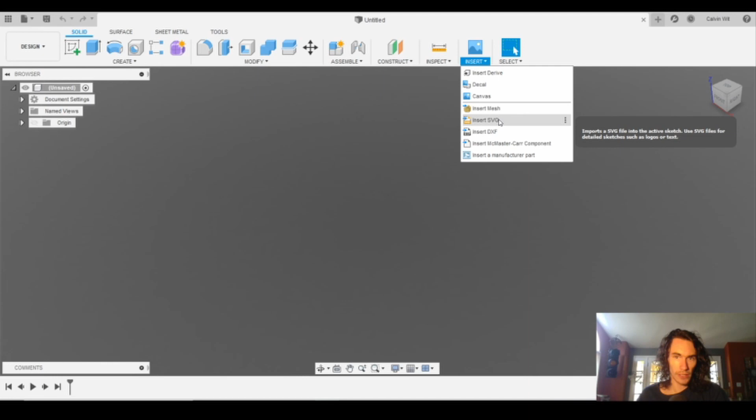Now, here we are in the Fusion workspace. It's actually pretty simple to pull this off. What we're going to do is go to Insert, then Insert SVG. I like working in the top plane whenever possible.

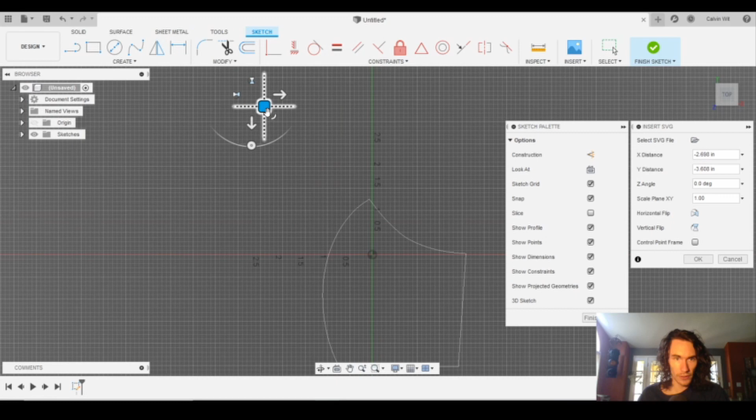Select the SVG file, and I know it's under my downloads. And you guys get to see all my downloads. I've already gone through and made these for my friend, obviously. But when you get your SVG imported, you can just drag it so it's approximately centered. The sizing looks right, I'm not going to worry about that. I'm going to say OK.

You'll see here, this is our SVG template. Now what we can do is press Finish Sketch, press E to extrude, and I like to pull mine up about 1/8 of an inch. I find that works pretty good.

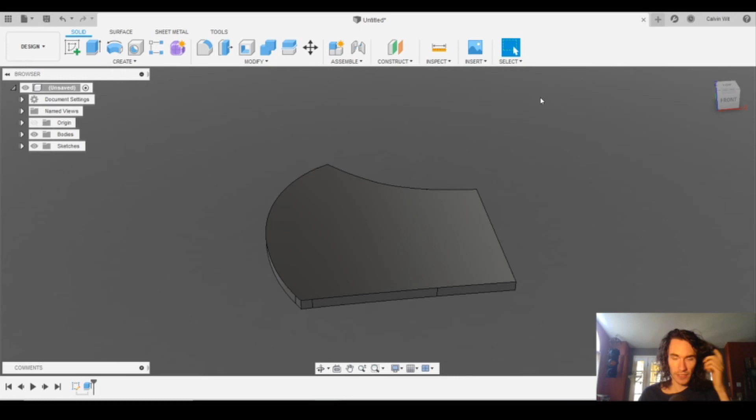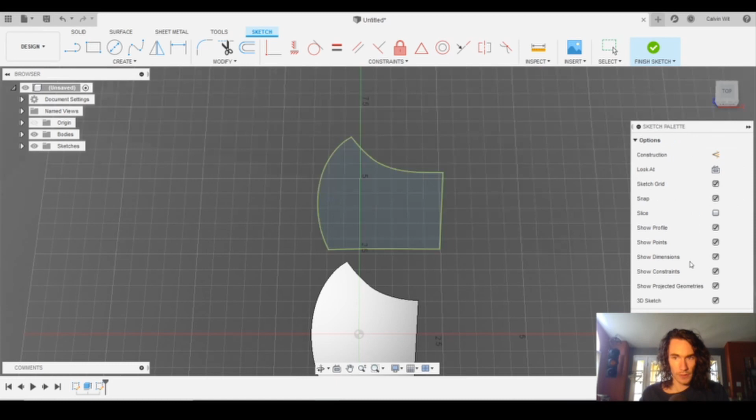You can do more, you can do less, it's up to you. Nothing super fancy, but one thing I found really helpful is that with this mask style, there's an inside and an outside part. Let me call up the other guy while we're at it. You'll see one is bigger than the other, and different sizes are going to obviously be differently shaped. So we'll just pull that guy up as well.

So now you can see we got the mask templates, but if you have a whole bunch of these, I don't know what's what. So what I'll do is come along to create a sketch, and just create a sketch on the top plane. Go to create text, click in there, and in this case, this is...

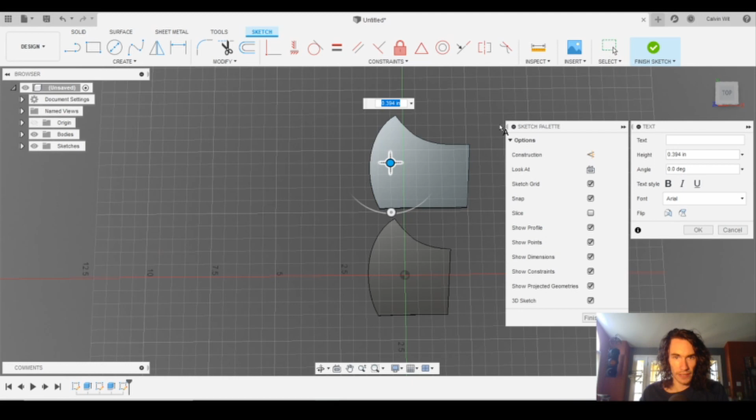3-7 O. I'm just putting the O for out, just for the sake of space. We'll just increase the font size. Obviously, you can do this how you want, it's completely up to you.

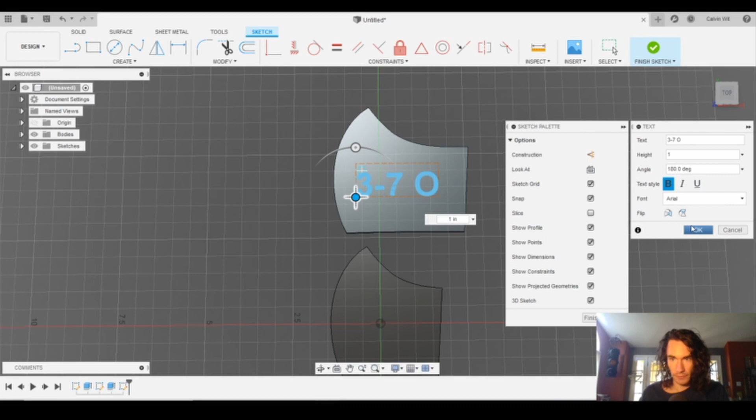If I really wanted to annoy all my graphic design friends, I would use this font, but for the sake of not annoying them and not getting screamed at in the comments, we're not going to do that today. But now that we have our text on there, we can finish the sketch. We can press E to extrude, and we'll deselect that. And we can pull this down, -0.2 or whatever. So you'll see it's cut the text into the top there.

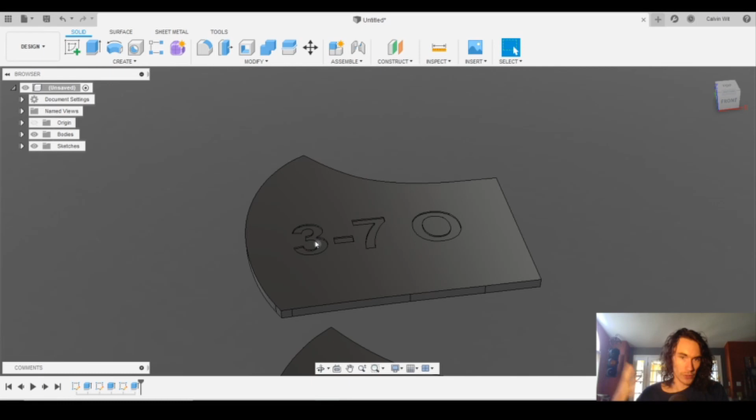So now we know this is size 3-7, or you can put whatever information you want on there. Just note that because of your printer nozzle, you're going to want to make the text pretty chunky. Otherwise, it might have a little bit of a hard time doing it.

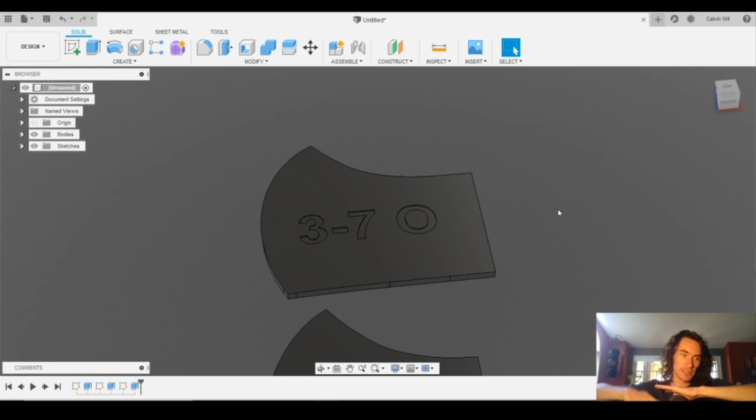Alternatively, instead of embossing the text and pulling it out, you could deboss it and pull it down. Personally, I like embossing it in there, but that's just personal taste.

All you would need to do is go to File, 3D Print, click on the item — I don't want to go to Meshmixer — and type in whatever name you want. Like I said, I already have a model of this.

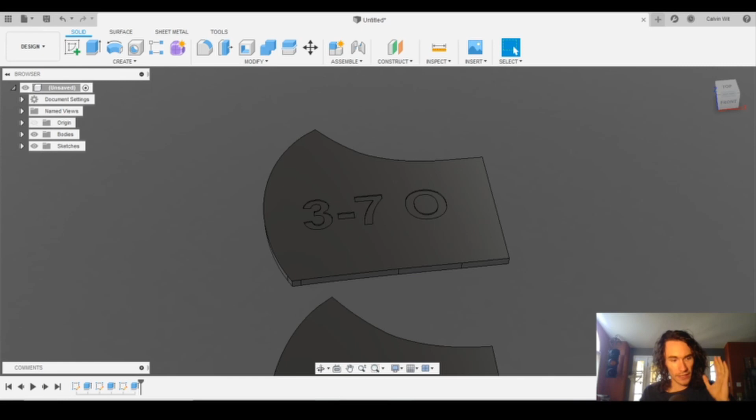So now we can jump into my slicer, and because I constantly get asked this, no, Simplify 3D is not the best slicer. I just use it because that's what I've had for years and I'm most familiar with it, but I could totally go into Cura as well.

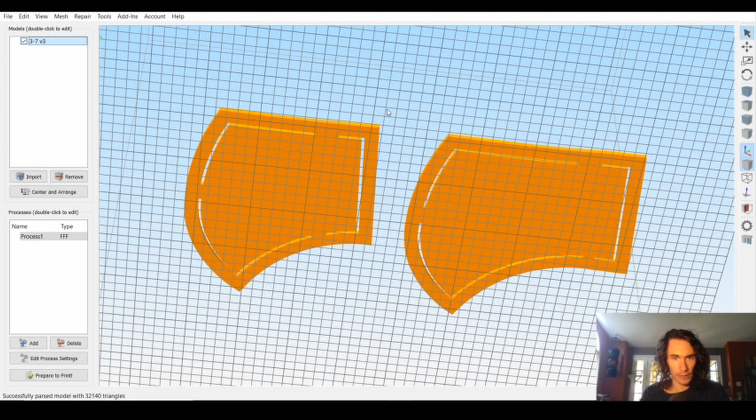Now you'll notice that this style is a little bit different than the style over here in Fusion. At the time, I had made a slot for a seam allowance, and to be honest, I really don't know if that was necessary or not. It's there on some of them, not on others. I really don't think it's necessary, hence I did not show how to pull it off.

The main point with this is it allows you to just set this down on a piece of fabric, go around it with a pencil or chalk or whatever your preferred marking method of choice is, and then cut the shape out. Alternatively, if you were careful enough, you might be able to go around it with something like an X-Acto knife, but I'd be a little careful, because the material could get kind of nicked up doing that.

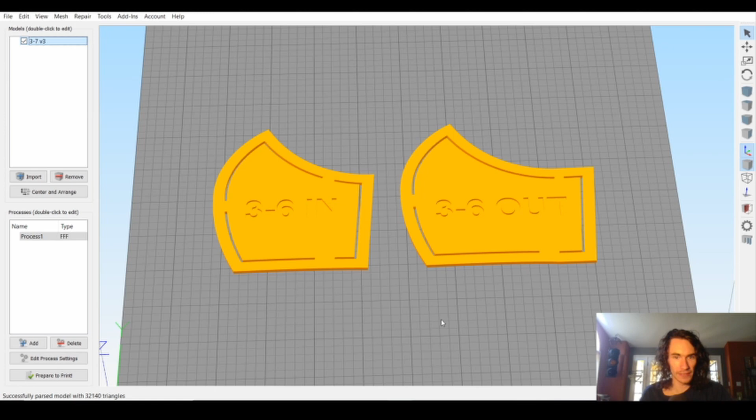So then you can go ahead and print these. Depending upon the thickness of them, I would definitely print them with about 3 perimeters and about 4 to 5 top layers. I did mine in flexible filament.

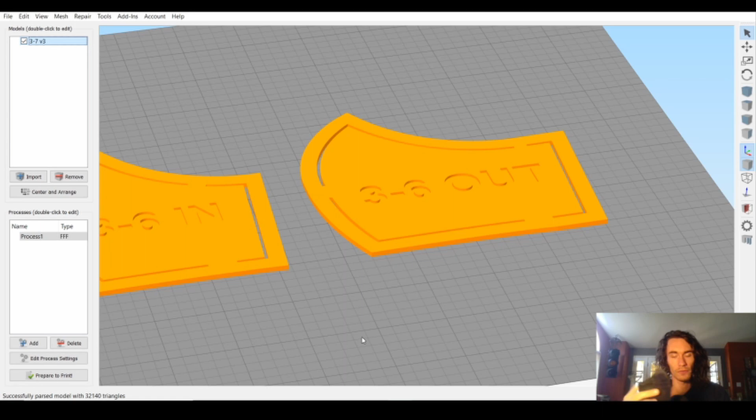It worked better, but I figured out that trying to stack the two materials was just way too much work and not worth it.

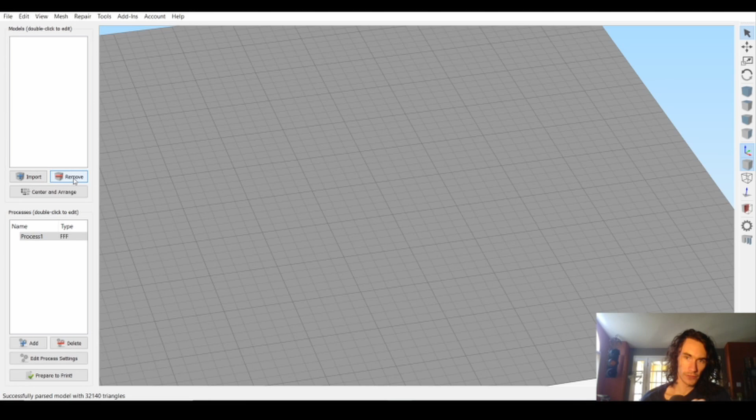So just making this from flex was nice. Also, it's flexible, so if you just throw it into a box or something, it's not going to run the risk of getting damaged. So I hope you guys found that somewhat useful.

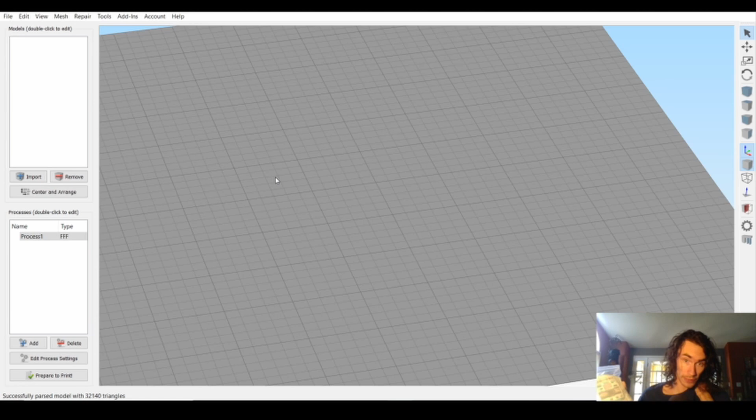Obviously, like I said, I'm not telling you how to build it, I'm not telling you what materials to use. I do know that you can purchase things like this, which is non-woven polypropylene. I actually got this off good old wish.com. From what my friends in China tell me, these are pretty much liners that you put inside of a mask to allow you to use it longer. So if you really wanted to theoretically up your protection, something like this might be worth looking into.

But like I said, I'm not telling you how to do it. I am not an expert on any of this. I'm just trying to show you a way that you can create templates using 3D printing and Fusion 360. So I hope you guys found this useful, and I'll see you next time on Make It with Calvin.